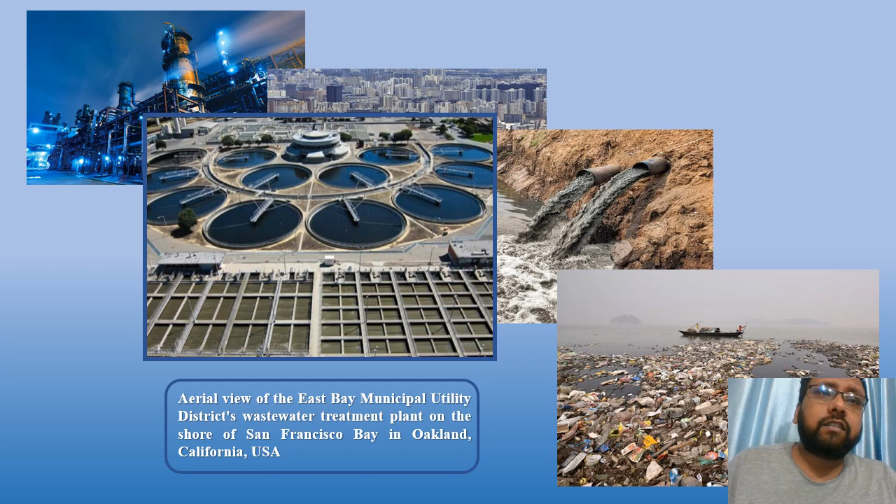So, if we try to understand wastewater, we must first try to understand wastewater quality in terms of standard water quality parameters. In case of domestic sewage, one of the most important and predominant factors is the presence of excess organic matter, which predominantly exists in reduced form. This reduced organic matter exerts a pressure on oxygen availability, and therefore domestic sewage is usually devoid of dissolved oxygen. We know that dissolved oxygen is essential for the sustenance of any form of aquatic life.

So we define this particular excess reduced organic matter and measure it in terms of various chemical parameters, specifically total organic carbon, which is basically a measure of the total organic matter present in any wastewater. This can also be measured in terms of chemical oxygen demand. What is chemical oxygen demand? It is basically an indirect measure of the organic matter present in wastewater, measured as the amount of chemical oxidants required to oxidize the organic matter that is present.

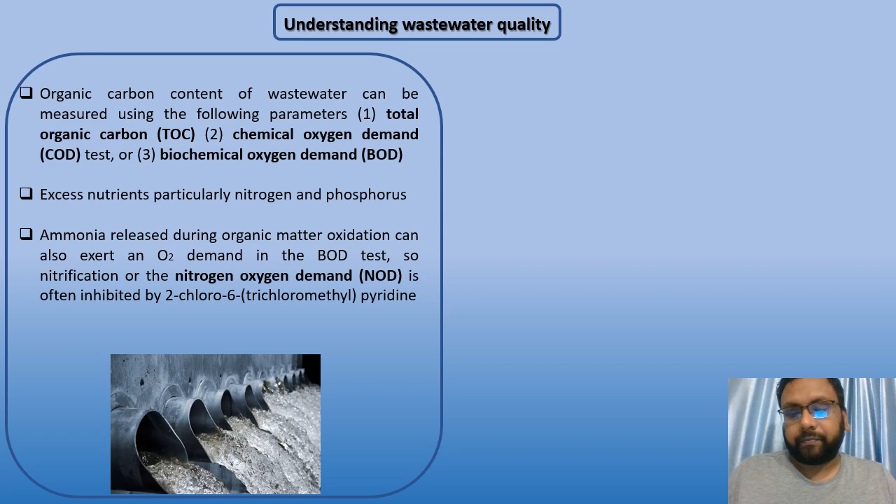Now the second parameter which is of particular importance and concern is fecal contamination of domestic sewage, because we know that domestic sewage is typically rich in fecal contamination.

But how do we measure fecal contamination? We measure it by using an indicator organism or a group of indicator organisms known as coliforms.

How do we define coliforms? Coliforms have particular criteria: they must be facultatively anaerobic, gram-negative, non-spore forming, rod-shaped bacteria capable of fermenting lactose with gas formation within 48 hours of incubation at 35 degrees Celsius.

Common examples of fecal coliforms include E. coli or Klebsiella pneumoniae. If these microorganisms are found in a sample of wastewater, this indicates fecal contamination, and there is a test known as the most probable number index.

Based on the MPN index, we can decide the degree of fecal contamination. If the MPN index is very high, suppose 1000 coliforms per 100 ml of water, that water is unsafe for any kind of human usage and has been heavily contaminated with fecal matter.

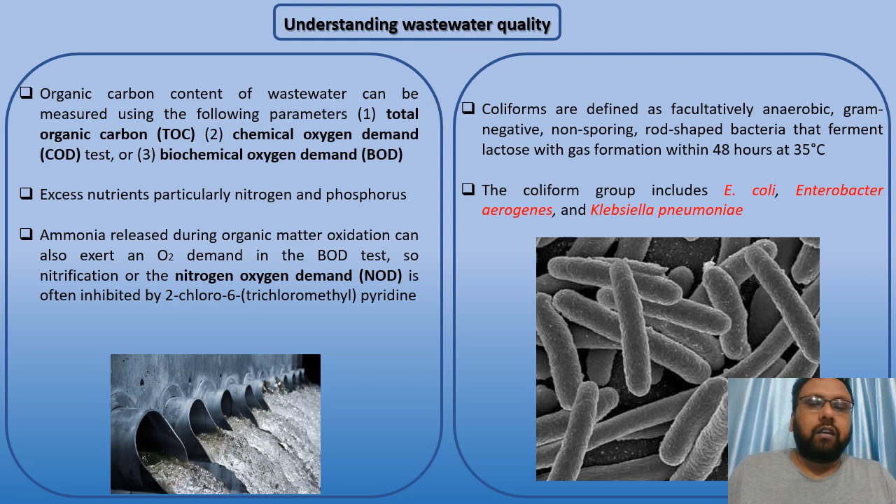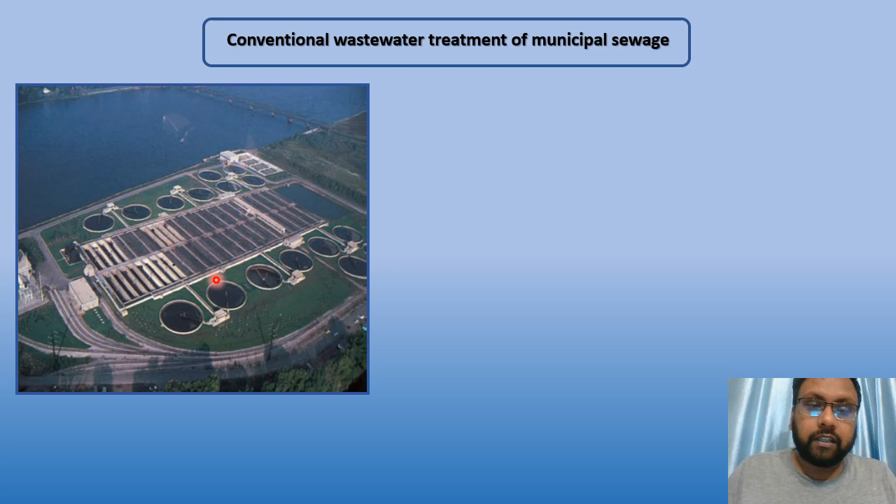Conventional wastewater treatment for municipal sewage utilizes multiple ponds or engineered systems used in a sequential manner. Here we see an aerial view of a typical wastewater treatment plant, where wastewater is treated sequentially through different stages, commonly known as primary treatment, secondary treatment, and tertiary treatment.

Primary treatment essentially involves removal of suspended solids like suspended particulate matter, and the most commonly used method is sedimentation by action of gravity. Sometimes coagulation agents like alum are occasionally used to remove excess suspended particulate matter.

Secondary treatment of municipal sewage is the most energy intensive as well as the most cost intensive process. Here we have different technologies like trickling filters, extended aeration, or activated sludge systems, which are responsible for removing almost 90 to 95% of BOD. We will come to these treatment technologies in later sections.

Finally, we have tertiary treatment, where there is biological removal as well as chemical removal of excess nutrients like nitrogen and phosphorus, which are essentially removed predominantly using chemical agents.

In primary treatment, we have the action of gravity, sedimentation, or use of mild chemicals like coagulation agents. In secondary treatment, the main agent of change is biological: the activity of microorganisms that consume organic matter and excess nutrients, thereby reducing the BOD, or biochemical oxygen demand. Finally, in tertiary treatment, which is heavily dependent on chemical agents, excess phosphorus or nitrogen is removed.

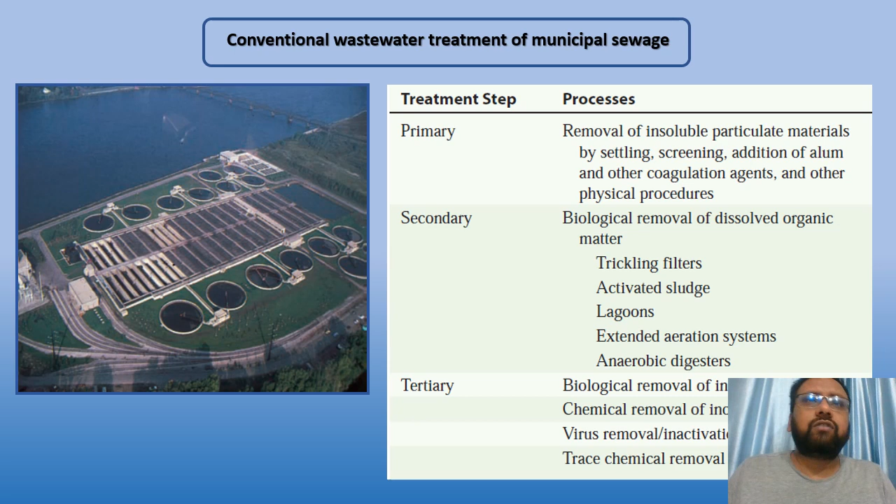So we have primary treatment. As we can see here, the water is allowed to stand for a given period of time, which allows sedimentation due to gravity to take place, resulting in usually around 20 to 30% of BOD that gets removed, because the biochemical oxygen demand associated with the suspended solids gets removed or reduced.

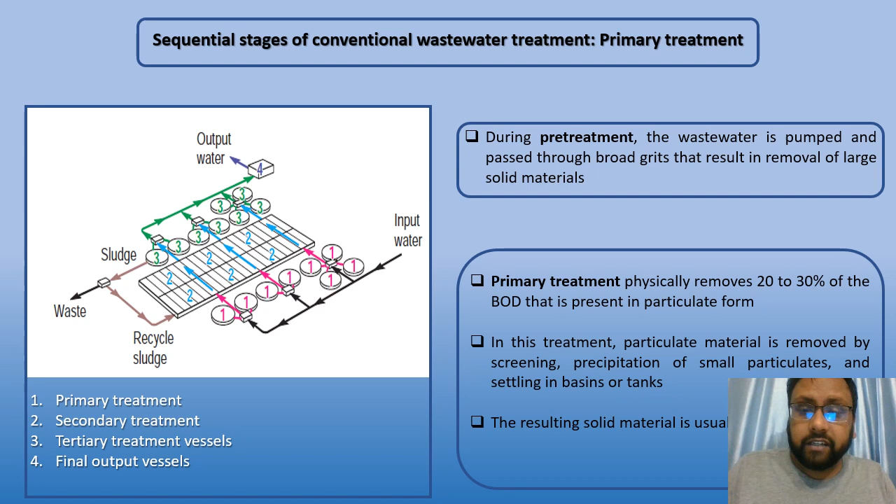Next comes secondary treatment, which, as I said before, is the most energy intensive as well as the most cost intensive process. Here, the main agents of change are microorganisms and their activity, though this requires significant technological interventions by which the BOD is significantly reduced by almost 90 to 95%.

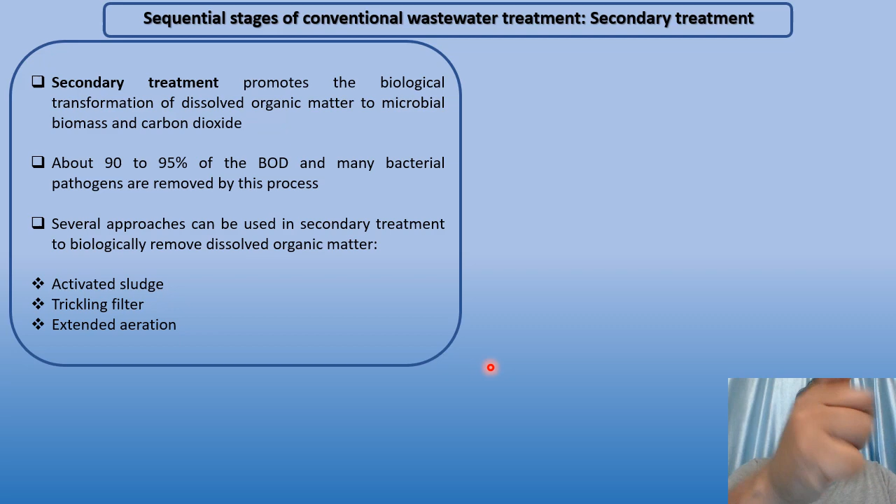The common wastewater treatment technologies are activated sludge, trickling filters, or extended aeration processes. These are not used together, but can be used individually, and any of these treatment technologies basically qualify as secondary treatment. If there is proper secondary treatment, we find that microorganisms form these kinds of structures.

This is proper sludge formation, and this sludge also has many downstream applications, like they can be used as fertilizers, or they can be used as sludge for other treatment processes, and they have many other applications.

This is also obtained from primary treatment, but the significant amount of sludge produced is usually during secondary treatment. If there is improper sludge formation, that is improper growth of microorganisms, some unwarranted filamentous microorganisms may grow, causing flocculation. This is an inefficient process resulting in inadequate removal of BOD, and this flocculation is not as simple to remove as sludge is.

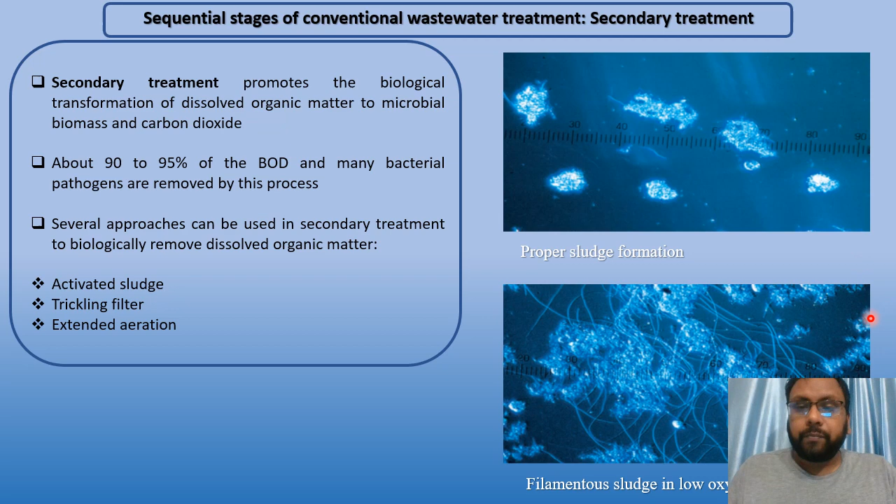Moving on to specific treatment technologies, let's start with activated sludge. Here we have a schematic diagram showing how activated sludge systems work. We have mixers which ensure aeration and the availability of oxygen.

This is the aeration basin, and water from the primary treatment process or primary clarifiers is introduced into this basin. Mixing happens with the help of impellers, leading to biomass production, and the microorganisms growing here utilize the organic matter present in wastewater as a form of nutrient, thereby removing the excess nutrient.

We then move on to the final clarifier, where we have treated water on top, and this conical shape results in efficient flocculation or sedimentation of the sludge produced. This sludge is recycled back into the activated sludge system because it contains a population of actively growing microorganisms. Some of the excess sludge can be used as biofertilizers or to produce bioenergy, and the activated sludge is also returned in this type of system.

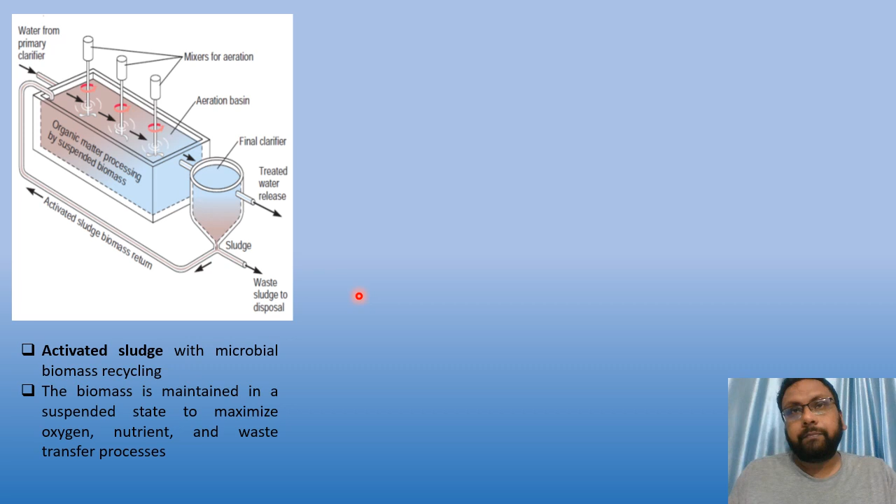So with the help of this schematic diagram, we find that the activated sludge system can be a very efficient treatment system, removing almost 90 to 95% of BOD.

The second intervention method we have is basically trickling filters. Trickling filters have large aeration basins, and the water produced by primary treatment is distributed onto a bed of sand and gravel through distribution booms, resulting in heterotrophic growth of microorganisms on the rocky and sand surfaces.

This leads to the formation of biofilms, and the microorganisms that grow within these biofilms utilize the excess nutrient present in the wastewater very rapidly, removing the excess nutrients and resulting in the formation of treated wastewater.

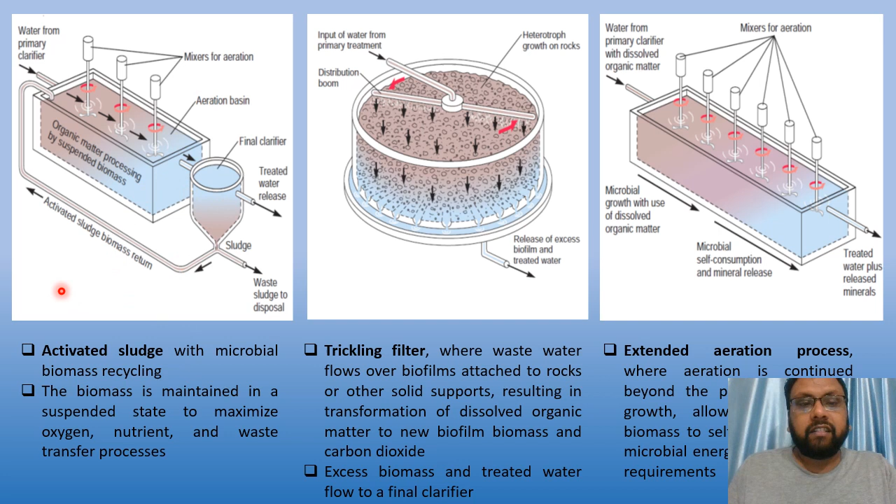These are much larger than the activated sludge systems, with multiple mixers, basically impellers, ensuring proper aeration. The water is retained in these aeration basins for a considerable, extended period of time, and the microorganisms utilize these excess nutrients. Eventually the biomass produced is sort of exhausted after the extended period of aeration, and we have the water that is eventually treated.

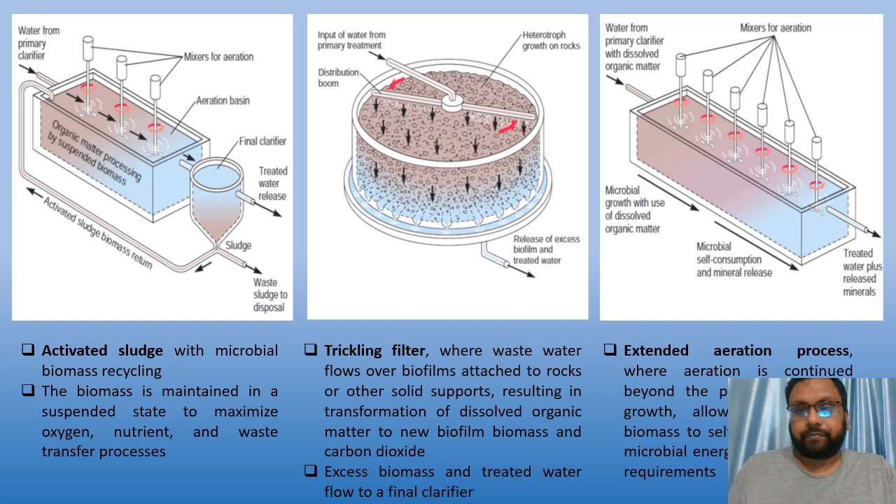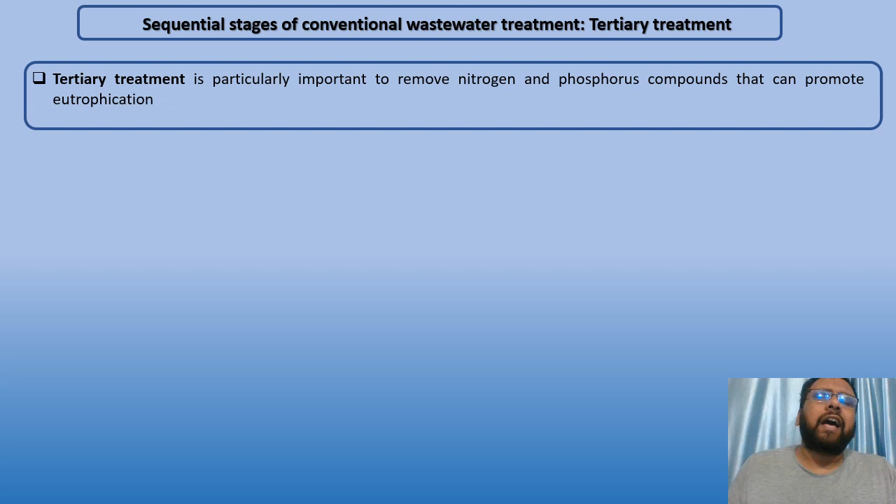Finally, we have tertiary treatment. This is again a very expensive step of wastewater treatment. Although, unlike secondary treatment where we have significant technological intervention like aeration basins, mixers, and distribution booms in case of trickling filters, here we use chemical interventions with strong chemical agents to remove excess nutrients like nitrogen or phosphorus that still remain in the water.

These can be removed chemically. To remove phosphorus, we can precipitate the excess phosphorus by the addition of lime or some chemical agent, which results in the formation of insoluble precipitates of phosphates like iron phosphate or calcium phosphate if we use lime. Alternatively, there are certain microorganisms that can also utilize this phosphorus and accumulate polyphosphates as biomass, but chemical methods are more common.

With the removal of excess nitrogen, we can use the volatilization of ammonia at very high pH. Alkaline treatment can lead to the removal of ammonium as NH3 gas. This is called ammonia stripping or nitrogen stripping. And of course, ammonia can be chlorinated.

The chlorination step also removes certain pathogens which may not be removed during the secondary treatment. So chemical treatment like chlorination ensures that the pathogenic organisms usually found in fecal contamination get removed in tertiary treatment. In secondary treatment, when the excess biomass is removed, that sludge can entrap some of the coliform organisms or contaminant microorganisms. But chlorination or treatment with excess alkali or lime also ensures the removal of some pathogens of concern usually found when water is contaminated with fecal matter.

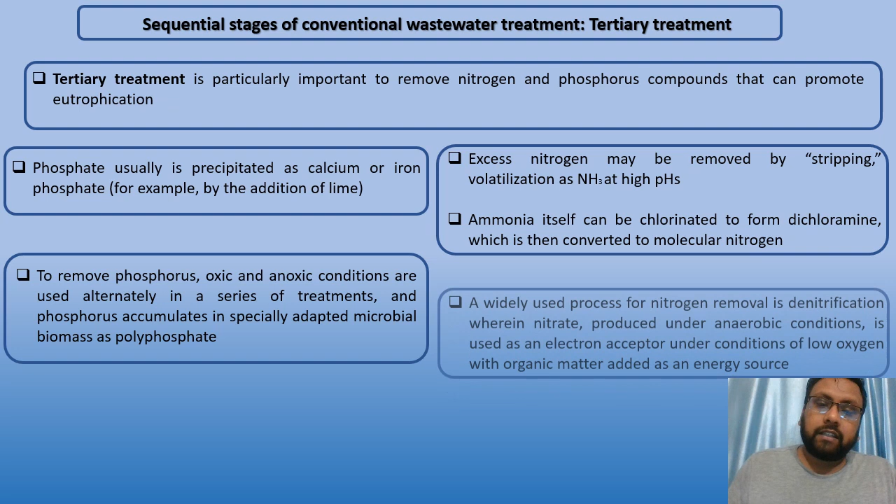There is an interesting process known as the Anammox process, which is the anaerobic oxidation of ammonia in absence of oxygen. Basically, ammonium reacts with nitrite to produce nitrogen and water. So there is removal of ammonium as well as nitrite in the form of nitrogen gas with the production of water. This is a very new process, discovered in the last few decades, and is now actively being explored for wastewater treatment to update our wastewater treatment technologies.

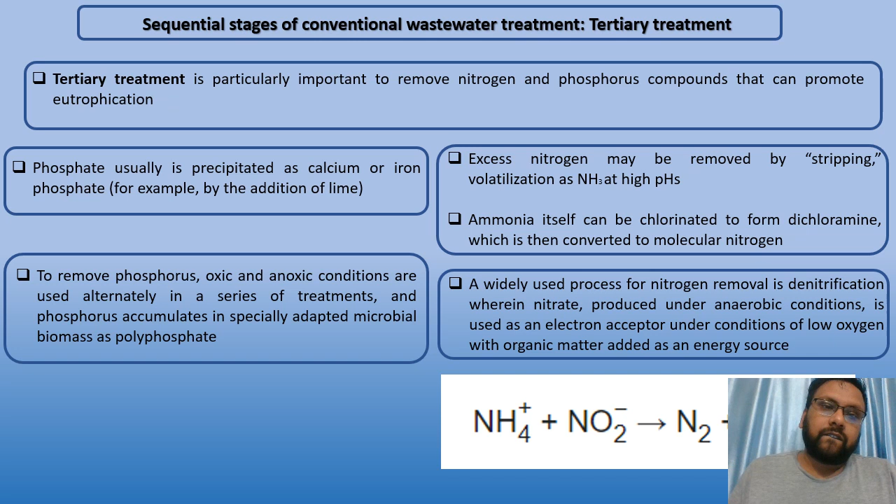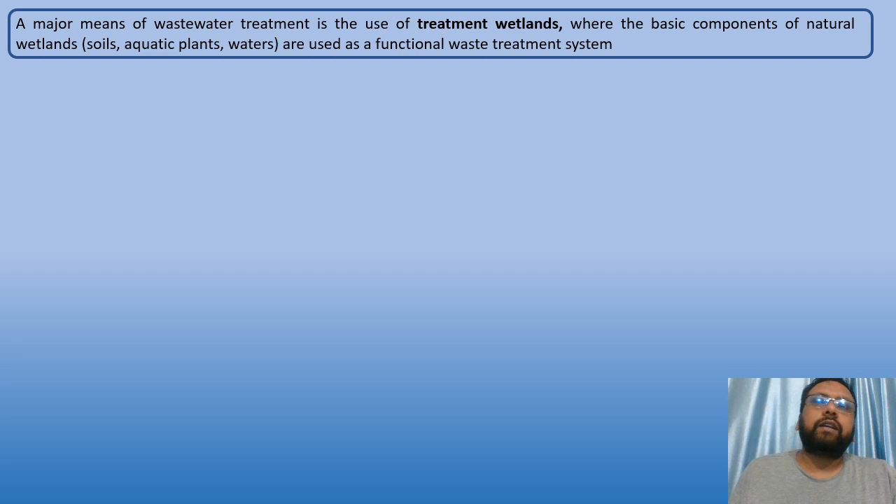The conventional wastewater treatment, like I said before, uses multiple tanks or engineered systems in a sequential manner, with significant energy cost as well as technological intervention. Now, there is a much simpler treatment technology that can be used, known as treatment wetlands. These can be natural treatment wetlands or engineered treatment wetlands, and they can also be used in a sequential manner.

Here we seek intervention using biological agents like plants, like macrophytes. We know water hyacinth can be used. Water hyacinth can be a natural accumulator of oil and grease, and a natural accumulator of heavy metals, particularly mercury. Sometimes water hyacinths and other aquatic macrophytes can accumulate these heavy metals or oil and grease contamination, and these treatment systems can be used in a sequential manner.

There can be broadly two types of treatment wetlands depending on the direction and nature of the water flow. One can be vertical percolation, where the water from a mechanical clarifier is introduced vertically, and the floating macrophytes will remove some of the excess nutrients, contaminants, or pollutants. These can be connected in a sequential manner, helping remove pollutants like suspended solids, BOD, organic nitrogen, as well as phosphorus.

These vertical flows can be interconnected with horizontal flows. Horizontal flows can be of two types: surface flow and subsurface flow. In subsurface flow, the water flows to the subsurface of the treatment wetland, and these contain usually rooted macrophytes that accumulate nitrites as well as phosphates. So they remove the excess nutrients present in wastewater, and this can be interconnected to other vertical flows in this kind of series.

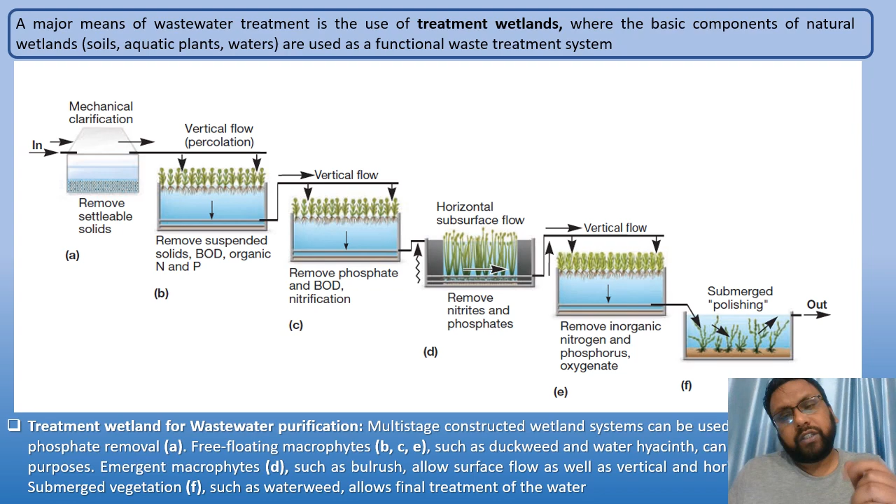Finally, the water we get by connecting these treatment wetlands is relatively cleaner from where we started. It has been much more purified, and this can be used either for agricultural purposes or for surface water discharge like irrigation and different uses. So this covers most of our wastewater treatment technologies for domestic sewage, which is the single largest form of wastewater in the world.

That brings us to the conclusion of this presentation, and I will finish with a quote from Madame Marie Curie, who said that nothing in life is to be feared, it is only to be understood. Now is the time to understand more so that we may fear less. And with these words, I will conclude this session. Thank you very much for listening.